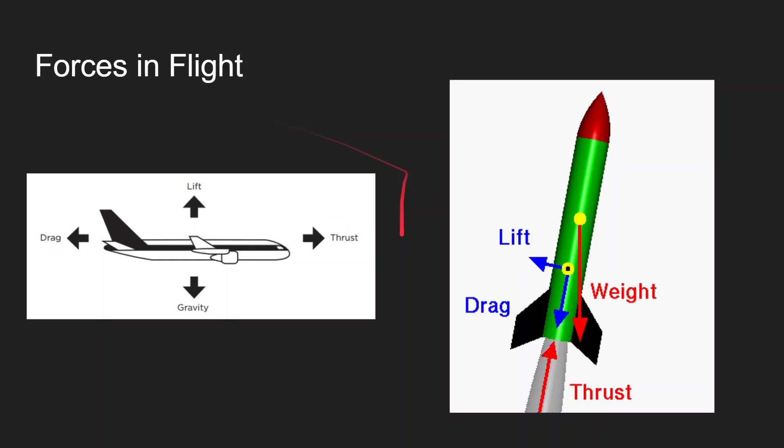Who's unmuted? Okay, they're muted now.

All right. So gravity or weight. Now this is like a fundamental force that all matter experiences between each other. Now it's actually relatively weak, so there has to be a very, very large amount of matter for this to have any significant effect. So it's ever present; when anything's in flight, gravity's always going to have an effect. It's the only one of the four forces that literally can't be turned off ever.

Now, a common misconception is that since there's no feeling of weight while you're in orbit, or say on an escape trajectory, there's no gravity. This is simply not true. There's still going to be gravity. It's just that your relative acceleration to your vehicle, for example, is going to be zero, right? You're not accelerating relative to the area around you, so that's why it feels like there's no weight. But it's always there, even in outer space, far away from anything. There's still going to be a little bit of gravity.

Now, let's look at how it's calculated and the equations for it. So, if you're very close to sea level, anywhere on the Earth's surface, really, this first equation can be used here. Fg means force of gravity, and it is equal to mass times the gravitational field strength on the surface. Now this is on Earth. This is calculated to be 9.81 meters per second squared, and you just plug in your mass of anything you want to measure, and this will tell you the force.

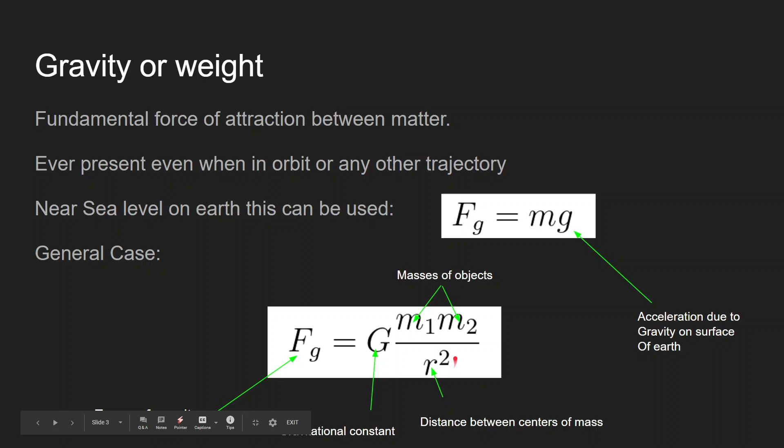Now, through experimentation, the people who created this equation also discovered that gravity is proportional to the inverse square of distance. So basically, what this means is the further you get from a mass, the weaker the force of gravity becomes. And it's a squared term, so it actually has quite a big effect.

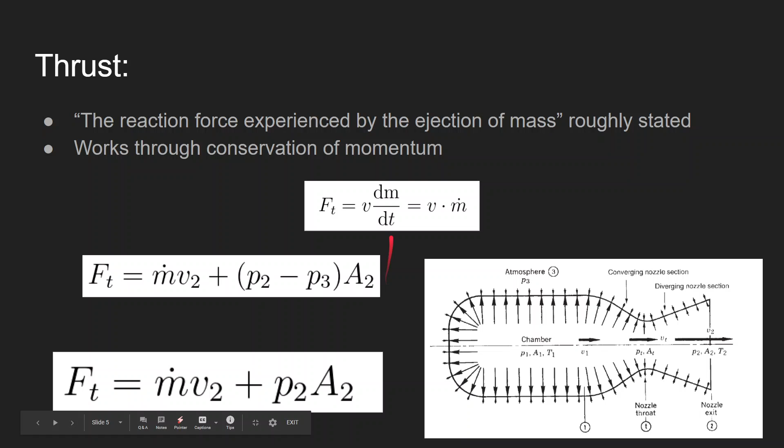So let's have a look at this example problem. A rocket engine's exhaust moves at 1700 meters per second. So that's the V2 quantity from the previous slide. And the mass rate is 10 kilograms per second. The pressure at the end of the nozzle is 150 kPa, so kilopascals, and its exit area is 0.1 square meters. What is the thrust at sea level? So this is the equation we're using.

So we get our momentum thrust from this part. So mass flow rate times speed. We get kilogram meters per second squared. These two multiply together, and that's just a Newton.

Now here we take the difference in pressure. We multiply by the area. So yeah, a Pascal is just a Newton per square meter. So these units also work out to newtons. And you can see we just add the two together, the pressure thrust and the momentum thrust. This is actually very significant compared to momentum thrust, so I kind of made my area kind of big for these numbers.

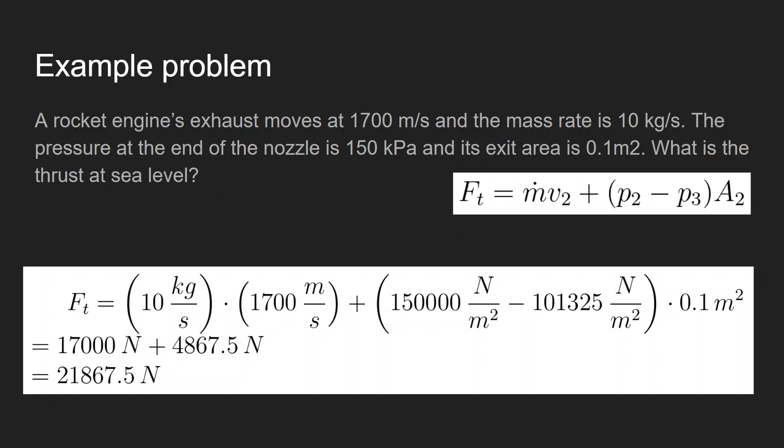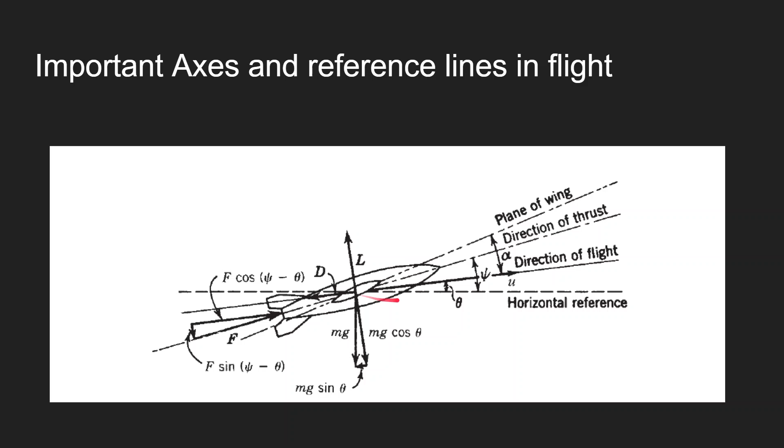We'll see this diagram later, and I'll explain the rest of the stuff on there in more detail. Okay, let's talk about lift. So lift is typically associated with the wings of an aircraft, right? Sort of the force that they push up onto an airplane with. But every single object will make lift in the air. Even if you drop a knife edge through the air, it will make a very small amount of lift, but it still makes lift.

Okay, so one of the variables is rho, or density of your working fluid. Working fluid essentially just means what are you traveling through? So most of the time it's going to be obviously air, but you can have lift in water as well. Some ships have wings that stabilize the ship underwater, and they're actually super effective because water is so dense, right? But usually we're thinking about air here.

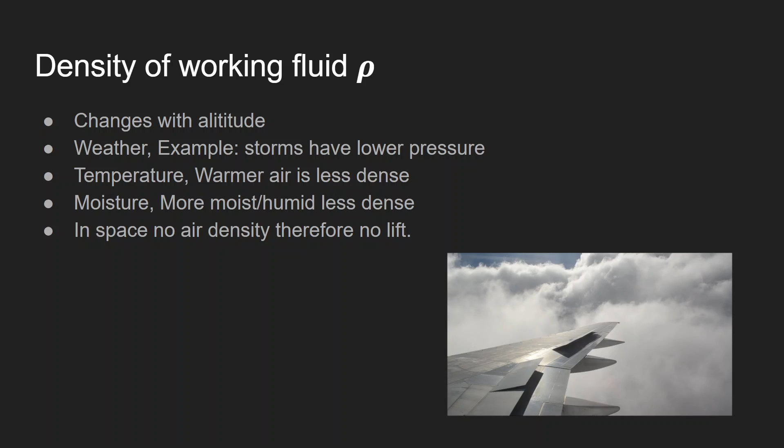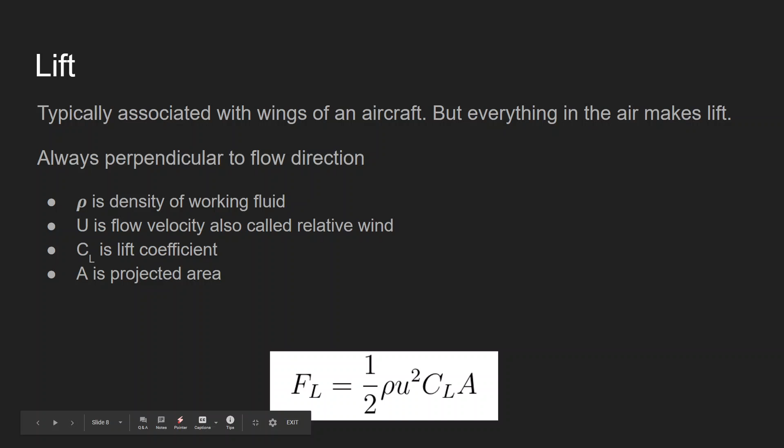Okay, so flow velocity. This is actually the most influential factor, honestly, because it is squared. If you remember the original equation, it's u in the original equation. If I go back, this is the flow rate or relative wind. It's important to keep in mind it's not how fast you're going over the ground. It's how fast you're going through the air that matters for this. There's actually not too much else to say about it. It's pretty straightforward.

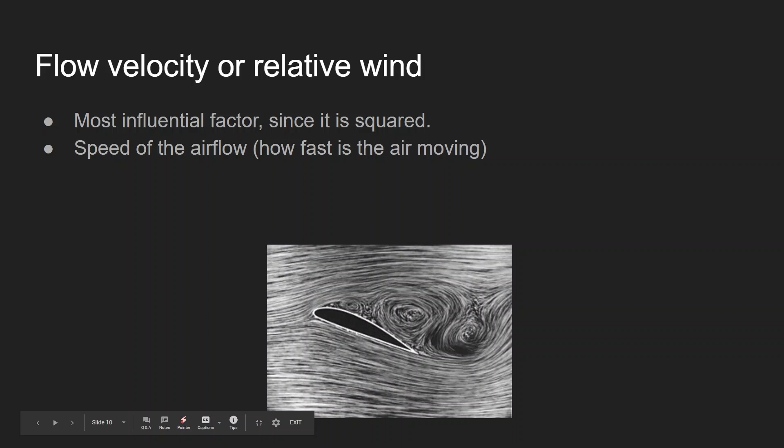Okay, lift coefficient. All other factors equal, this basically describes how good something is at creating lift with what it has. This is what aerodynamicists who work on creating lift for airplanes spend most of their time optimizing. So it depends on the angle of attack. Typically a lift versus angle of attack graph will go up, and then there's some critical angle where the lift is maximum, and then it will just drop off because of stalls.

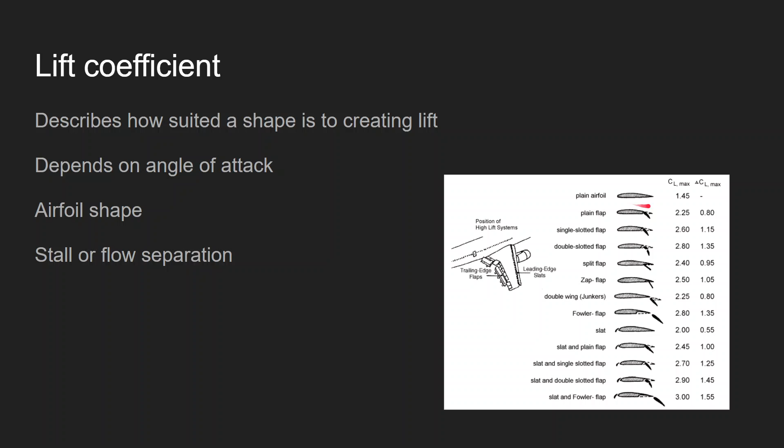Now, lift depends on the airfoil shape, and on whether you have any stall or flow separation issues. In this diagram here, I put a few examples. See how these more aggressive shapes that push the air downwards more have higher lift coefficients, but that pretty much always comes at the price of drag. So when people are designing airplanes, they have to think about this trade-off very carefully.

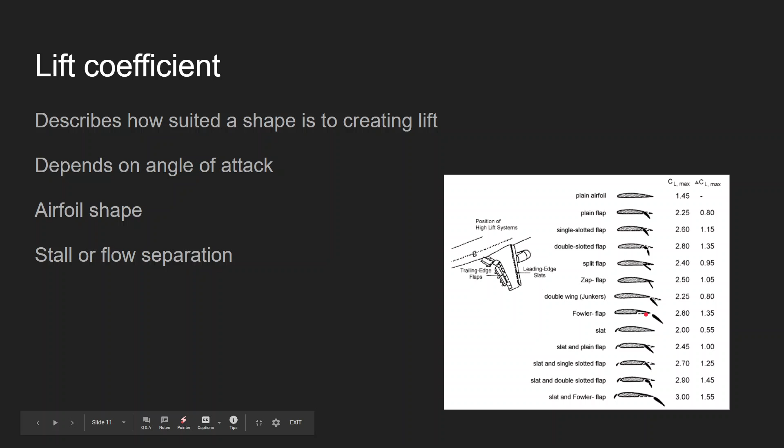Okay, and yeah, there's reference area as well. So this is the projected area perpendicular to the direction of motion. So for lift, yeah, this is kind of what they'll be referencing. So most of the time when engineers do this calculation, they'll take into account either like the whole plane or maybe just the wings and see how good it is at creating lift.

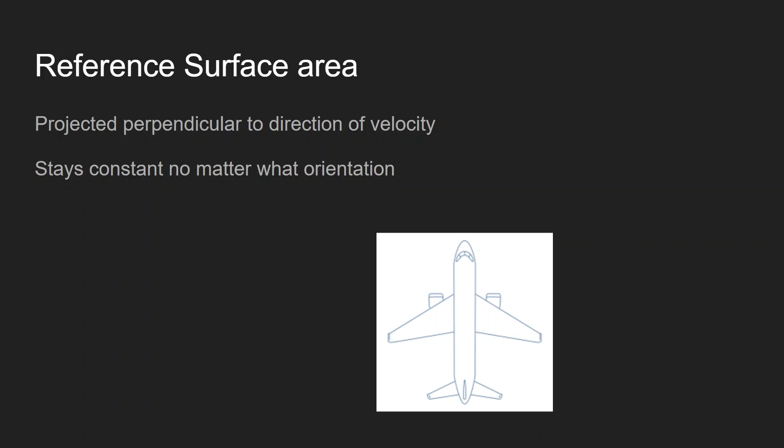Yeah, and this stays constant no matter what orientation. So essentially, even if you're flying upside down, you'll have like negative lift, but this reference area that you're projecting will stay the same.

Okay, let's talk about Bernoulli's equation and Newton's third law and how they relate to how lift is generated. So there's kind of two theories that both work in tandem and both do part of the explaining for why wings like this create lift. So I'll talk first about Newton's third law. So again, it's for every action, there's an equal and opposite reaction.

So what that's saying is essentially when this air is coming and hitting the wing, it's getting deflected and pushed downwards, right, by the wing. And in order to deflect that, the air has to push back up into the wing, kind of like thrust as well. So that's how Newton's third law explains it.

But there's also another part of it, and that's Bernoulli's principle. And this is the equation of Bernoulli's principle. Essentially, it's a sort of conservation of energy equation for fluids. So the pressure plus the kinetic energy plus the gravitational potential energy will always stay the same for a fluid. Now, for a wing, since you're changing your altitude very, very slightly, these H terms become insignificant, and you're only really looking at these two terms.

Now, what wings do is they accelerate the air that goes above. So that decreases the pressure, right? And increases the pressure at the bottom of the wing. They slow it down here and increase it here. So the pressure at the top drops, but the pressure from the bottom increases. So you have this net pressure difference that pushes up on the area of the wing. Pressure is force divided by area, and you have an area, so boom, you have force.

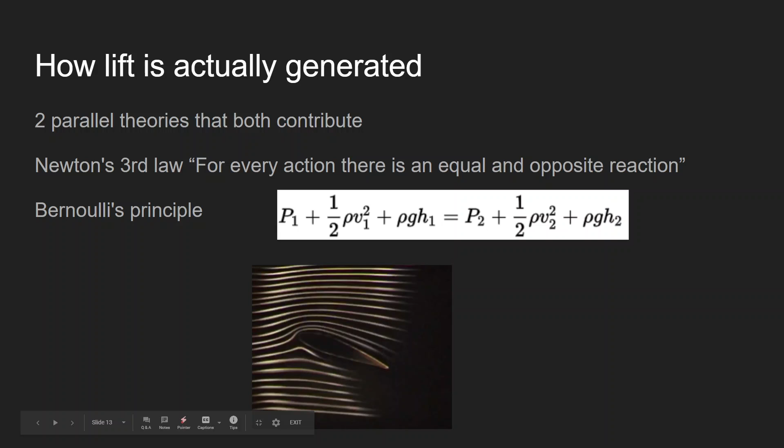Okay, let's do a lift example problem. The airflow around an airplane is 400 meters per second. The reference area is 100 meters squared, the coefficient of lift is 0.8, and the plane is flying at sea level. What is the lift force? So remembering the equation, it's 1/2. This is taken from a known quantity that you can look up for the air density. This is the speed, we're squaring it like I talked about, and then the lift coefficient and the area.

Now, this is what it ends up being. So this is actually 7.8 million newtons. It's a really big amount, but keep in mind that some of these factors are unrealistic. This lift coefficient is pretty high for planes flying at a level orientation with almost no angle of attack, which is what they do in cruise. This is also insane because this is sea level and this is flying really fast, so the drag forces would be insane.

Nobody would be flying at sea level while trying to go supersonic, which this is almost. Yeah, you multiply by 3.6, so it actually is supersonic. Nobody's going to do this, and this is a pretty significant area as well. So yeah, pretty ridiculous number.

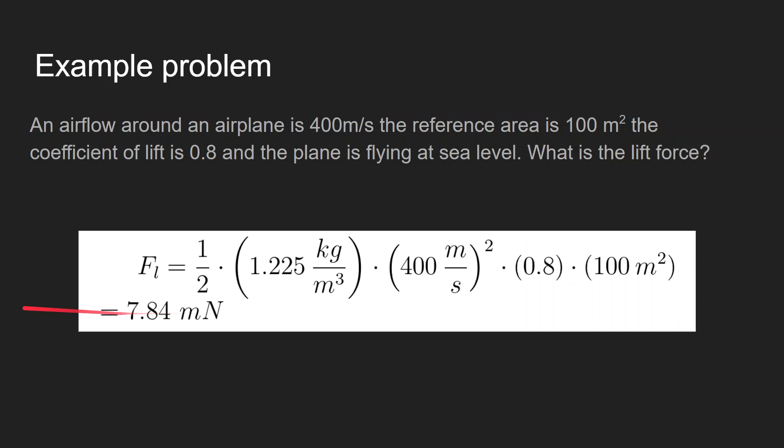Okay, let's talk about drag. I'm not going to go into every factor here because basically all of them carry over. The density and flow velocity are the same. Projected area is actually different. Instead of projecting from the top, you project from the front, the area that's punching into the air. And drag coefficient is not the same. That's going to change. It's going to be a different one.

Some vehicles will want to optimize drag coefficients. Some will want to optimize lift. It really depends. So you can manipulate them separately. They're not dependent on each other. So this drag can often be useful, right? Think about spacecraft that are trying to re-enter from orbit. If drag didn't exist, they'd have to use thrusters and a lot of fuel to slow down, the same as they did to go up.

But drag actually slows them down. How does it do this? Well, basically through heating. As air is compressed, it gets heated, and that takes a force to do to the air. So it's again like Newton's third law, and the air pushes back onto your vehicle.

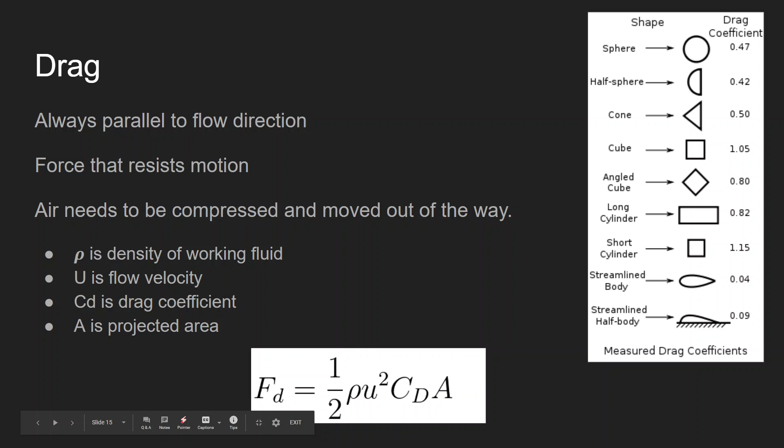Okay, so an example problem with drag. A rocket is traveling at 8,000 kilometers an hour at an altitude of 50 kilometers. The area hitting the airstream is 4 meters squared, and the CD, coefficient of drag, is 0.4. So it's not the best, not the worst, right? What is the drag on the rocket?

So I kind of picked this to just show. This is a typical altitude where first stage boosters separate, and I'll just cut to the conclusion before explaining. So you can see how this number isn't too huge. For such a big area, that's not a lot of pressure. And this is why rockets don't explode instantly when they separate, right?

Because the sort of scooping shape of the interstages is not very good. It has a high coefficient of drag, and if you have insane numbers here, that will literally rip apart your aircraft or spacecraft or whatever. So I just want to put some insight there. So yeah, let's work through the problem, right?

So 1/2 times. Okay, this is the air density. See, even at 50 kilometers, it's like 1,000 times lower than what it was at sea level. This is your speed. It's getting pretty high, right? Yeah, you can see it. Then just plug in your coefficient of drag and the area.

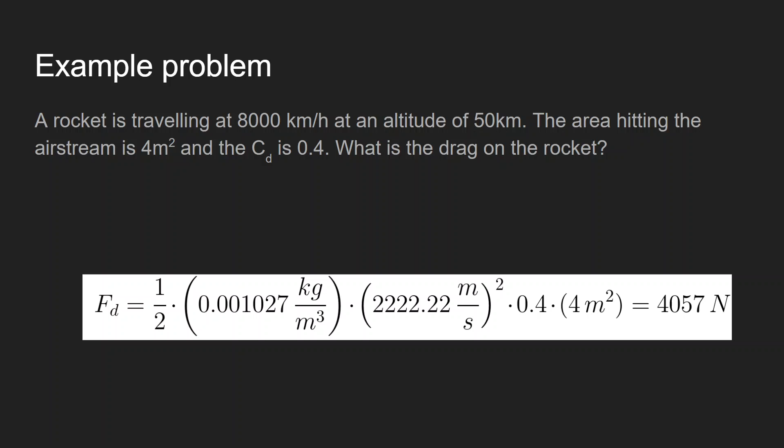Okay, I said I was going to come back to this diagram, so let's put it all together. The first equation up there is basically saying what is your net force along the direction of your flight, right? So this is mass d over dt. U is vehicle velocity, so the derivative of velocity is acceleration. So ma, we know that's force.

Okay, so this first part, F cos psi minus theta. Psi is the direction of your thrust over the horizontal reference, and theta is the direction of flight over the horizontal reference. So you take the angle between your flight and your thrust, and here's this line that points to this vector over here. So you can take a cosine if you know what that is. If you don't, don't worry about it. You'll learn it in grade 11, I think.

So minus drag. You don't have to do any fancy trick with drag because drag is always directly opposing motion. And this mg sine theta basically takes into account the gravity component that's opposing your flight. It's down here in this chart. Okay, so this is basically the vehicle acceleration perpendicular to the direction of motion.

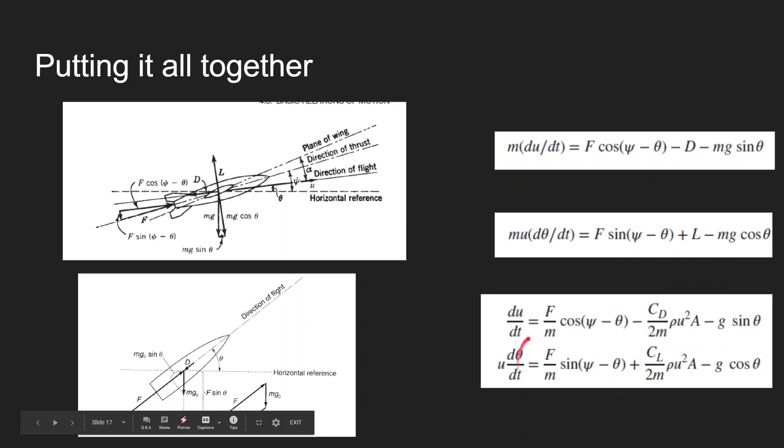All right, let's do a problem with some vector addition, right? So a vehicle is flying through the atmosphere. The drag is 4,000 newtons. The lift is 5,000 newtons, and the thrust is 2,000 newtons, and the weight is 5,000 newtons. So assume it is flying perfectly level.

I'm not going to do any of those crazy ones with angles because it would literally probably take 3 slides to solve. I'm not kidding. So I'm just going to do a simple one. So assume it is flying perfectly level. What is the net acceleration? So in order to get acceleration, first we need to figure out what the net force is.

So let's look at our horizontal forces. So when you're flying horizontally, drag is horizontal, and if you're thrusting horizontally, which we are in this case, thrust is also horizontal. So we had a thrust of 2,000, and our drag is actually pretty big, 4,000. So you can see that our net force is going to be negative, so we interpret that as 2,000 newtons backwards.

Let's look at our vertical forces. So lift and gravity, right? Gravity is always going to be directly vertical, and if you're flying parallel to the ground, then your lift will also be directly vertical. And for this case, I made them the same, so weight is 5,000 newtons, and lift is also 5,000 newtons, and you can see there's a force balance, and you're not accelerating up or down.

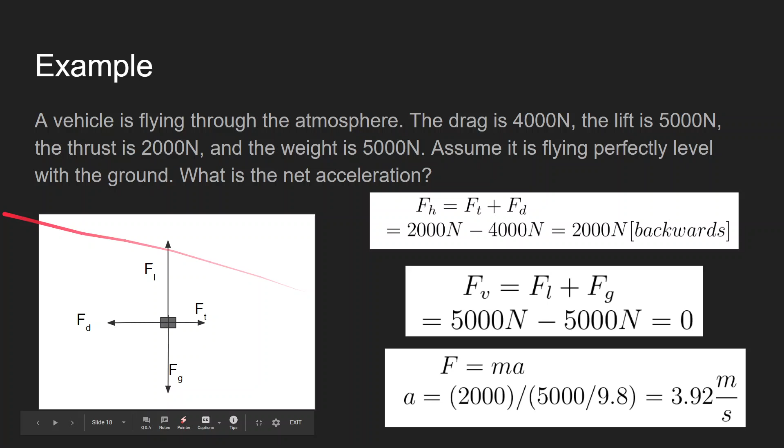Now this is interesting. This is looking at the gravity component, right? And to take force, you just need to divide by the acceleration of gravity to get the mass, right? So this is all this does. So 5,000 kilogram meters per second squared divided by meters per second squared, right? Gets us kilograms to plug into this. And this crunches out to 3.92 meters per second squared. Now it should say backwards because acceleration is a vector quantity, so you need to specify what your direction is as well. That was a mistake on my end.

Okay, let's talk about some quantities. So some velocity quantities related to rocket exhaust or rocket nozzles, just so that everybody's clear on what they all mean. So V2 versus C star. Now these can have other names, but I think these are the most common ones. So V2 is what you get if you basically just pointed a radar gun, right, at a particle leaving your exhaust and measure the speed that it's going at. It's about as simple as that. I mean, there's nothing else to say really.

C, or effective exhaust velocity. Okay, so the purpose of this, basically, from what I've seen, rocket engineers like to have a lot of different variables so that they can make their equations simpler, even if you have to keep track of a whole lot of variables and it can be confusing. So all effective exhaust velocity does is compensate for the pressure thrust a rocket engine can create. So you can just plug it in and pretend like all of your thrust is momentum thrust, plugging it into the force thrust equation, so mass flow rate times that effective exhaust velocity here, right?

So to crunch that, all you essentially do is take your actual exhaust velocity, your real exhaust velocity, which is V2, and you look at this pressure thrust section here, divided by mass flow rate to get another speed that you add to this. So that you can just plug in this directly and don't have to worry about that pressure thrust section when calculating it. And it also, I guess, has another use where it's like a measure of the efficiency of your rocket in general, similar to ISP, if you remember from last week. Yeah, that's pretty much it.

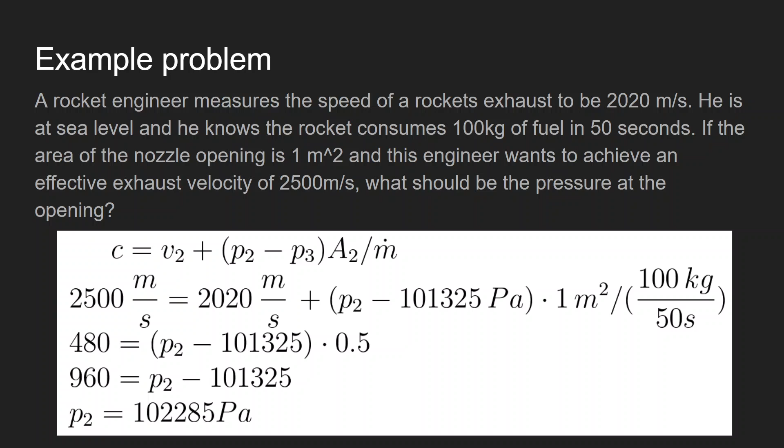All right, so let's review. I think Biscuit or Christian mentioned this briefly last week. So let's review the mass quantity. So engineers have a lot of these different mass quantities that they'll use to measure rockets, and there's a lot of different ways to break it down. Really all of them are very self-explanatory. They don't need to be explained too much, but just keep in mind, I guess the most important two to know are propellant mass fraction and mass ratio.

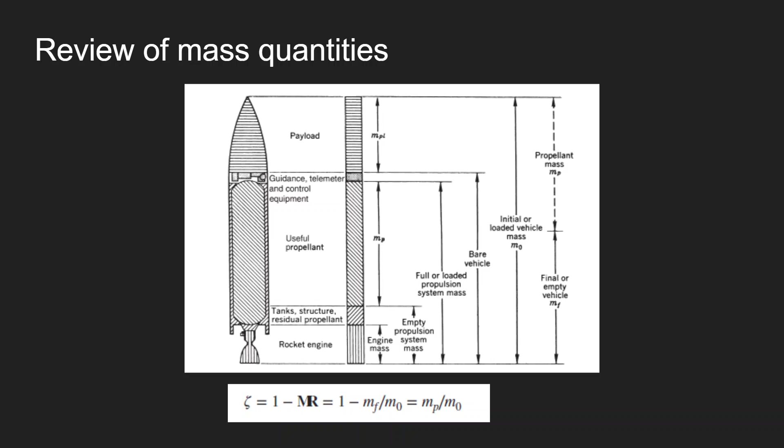So propellant mass fraction is propellant mass, so this section, over the whole vehicle, fully fueled and everything in it, and it's complementary to mass ratio, which is the empty vehicle over the initial mass. And you can see that represented in this sort of equation down here. Yeah, that's all there is to it, really. It's not too complicated of a unit. Just have to be aware of what they are, and there's a lot of them to keep track of. There's also mass payload that will be encountered maybe later on in some more complex or different formulas, maybe to calculate your payload to orbit capacity or something.

Okay, let's talk about the fundamental rocket equation or the ideal rocket equation. Has many names. It's all about the same thing. So what it's a measure of is how much can the vehicle change its velocity. It's actually a pretty simple idea. Now for rockets, since they go to space and often there's very little forces slowing them down, they have unlimited range. So really measuring range is kind of useless in rockets. Their capability is better represented by measuring how much they can change their velocities by.

It's kind of a measure of energy relative to size as well. I have to mention, looking through this, right? There's no thrust and there's no mass. So really those don't have an effect on how much you can change your velocity by. It's sort of all your efficiencies. So yeah, and it's always assumed to be in a vacuum and ideal conditions.

Because if you're in the atmosphere, you won't be able to change your velocity as much because there will be drag and gravity and other forces slowing it down. But let's look through this. So it's effective exhaust velocity. Remember we talked, it's here, it's VE. I think I had it as C, right? So that's basically an efficiency of how well your rocket engine is accelerating particles that go through it. So that's your kind of engine efficiency.